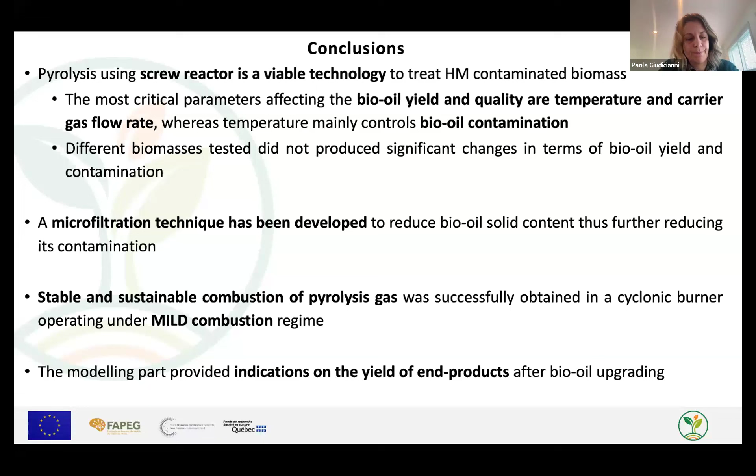Thank you very much. I don't know, can you hear me? No. Oh, right. Thank you. Thanks very much. And I hope, we're going to have to move on to another presentation online. So I hope your co-worker can answer your questions. Thank you. Okay. Thank you, Paola. Paola was joining us from Canada, so appreciate the early morning for her out there. Okay, now we're over to Chris Kick.

Chris, can you hear me? Yes, I can. Can you hear me? Good. Oh, wow, look at you. You look like an avatar. Okay, so can you share your screen? Yeah, I'm trying to do that. Second. What screen do I share? Your presentation, please. Do you already see some screen? I can see myself. That's good, I guess. Okay. Now you can see the presentation, right? Now I can see the presentation. Perfect. And you can hear me perfectly? Perfectly. We can only see a small corner of your face, but that might be intentional. Not really, but is it better now? I cannot see myself, so I don't know. Okay. All right. Floor's yours then. Yeah, thank you for having me.

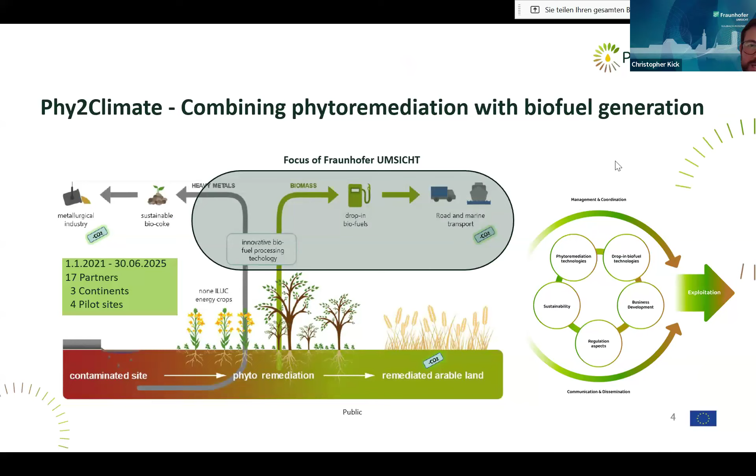So Phy2Climate in a nutshell. Phy2Climate basically combines phytoremediation with biofuel generation, and the project started in 2021 and it ends at the end of June 2025. It consists of 17 partners, it stretches over 3 continents and includes 4 pilot sites. Our part in the Phy2Climate project is basically the biomass conversion after it is harvested from the pilot sites and the subsequent refinement of the conversion products.

Our pilot sites are basically located in Spain and Lithuania, mostly contaminated with hydrocarbons, but the pilot sites in Serbia and Argentina are contaminated with heavy metals, above all cadmium, copper, chrome, lead, zinc, and arsenic. And this is important for the biorefinery concept, as we might focus and trap the heavy metals more in the biochar, whereas if we only have hydrocarbons as contamination, we don't have to care about that.

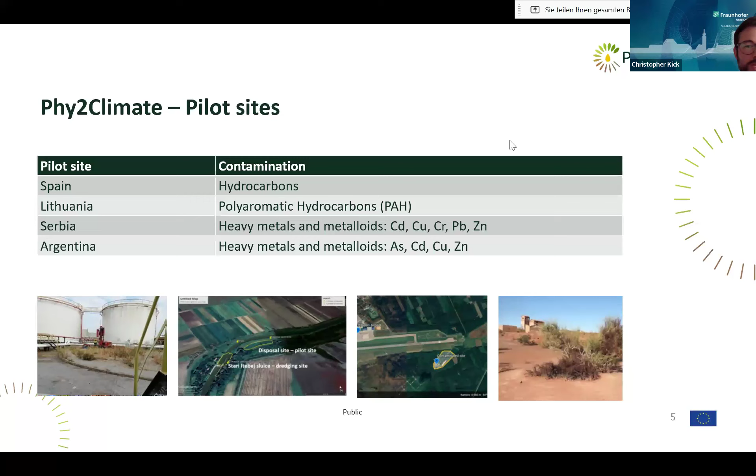Coming to the conversion technology within Phy2Climate, the requirements the project has on the technology itself, and also the product quality we can achieve. Well, as I said, the conversion is done with an intermediate pyrolysis based system called thermocatalytic reforming, short TCR. And it's a two-step process.

In a first step, it's an intermediate pyrolysis with an auger reactor where the biomass is broken down into biochar and volatiles in temperature ranges below 500 degrees. In a second step, those pyrolysis vapors will be led over the biochar at a temperature of about 550 to 750 degrees.

And in this temperature range, the biochar acts as a kind of catalyst, breaking down further long-chain hydrocarbons, effectively removing tars by that, and also increasing the product quality, especially the hydrogen content in the syngas, which is significantly increased from around 3% to about 40%.

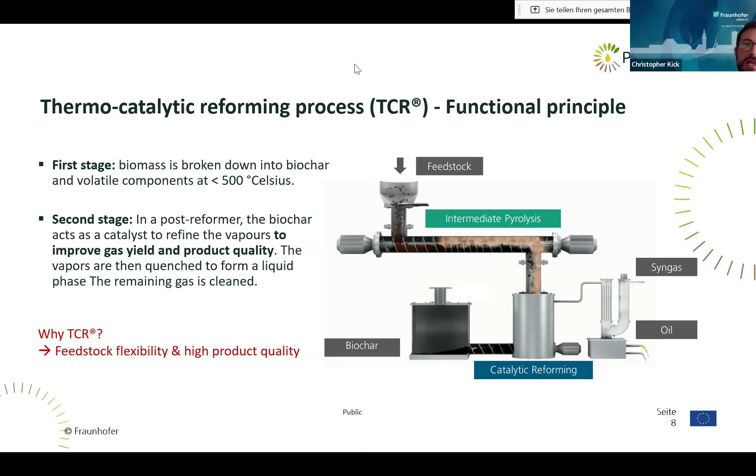So why TCR? Why not another technology? Well, first of all, in Phy2Climate, it comes to feedstock flexibility, as we're using lots of different feedstocks for the phytoremediation process. And on the other side, it needs high product qualities, because only high product qualities allow a further refinement to biofuels.

Speaking about feedstock flexibility, as I said, in Phy2Climate we're using different types of plants to remediate soils. For example, rapeseed, quinoa, sorghum, different mixes of herbaceous plants, and also Jerusalem artichoke. And with the TCR technology, we tested around 90 different biomass types, and they all worked. The biomass feedstocks had different chemical compositions, but also different textures, but it worked. The most important parameter is that they have a dry substance matter of above 70%, so they can be used in the process.

Coming to the product quality, as I said, it's important to produce not any kind of intermediates, but high quality intermediates so that they can be upgraded to ready-to-use biofuels. So with the TCR technology, it's possible to produce syngases with a hydrogen content up to 40%, which is important if you want to use gas to liquid processes afterwards.

Also, the oil we're producing is thermally stable, which means it can be processed in a classical oil refinery, which is also very important if you have a look at the economics of such a biorefinery. Because for small-scale plants, a decentralized refinement to full ready-to-use biofuels is probably not the way to go. And when it comes to biochar, we're producing biochar which is high in quality and can be used for different kinds of applications, like soil applications, but also material or energetic use.

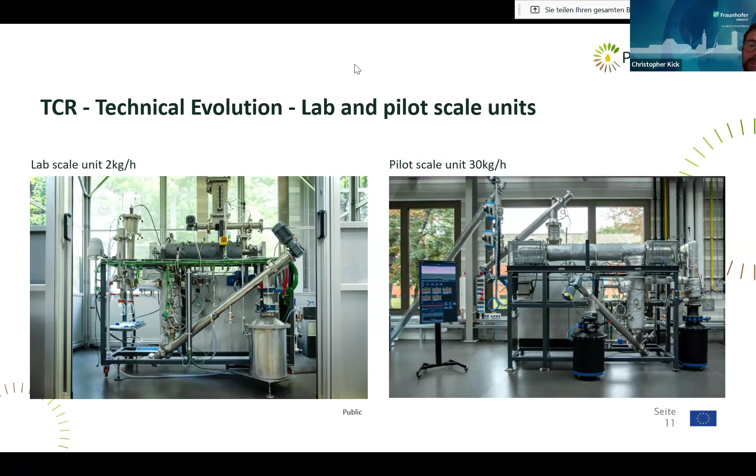Having talked about the functional principle and the advantages of the technology, I want to show the units we have. So starting with the smallest unit, our lab scale unit, TCR2, which has a feedstock capacity of 2 kilograms per hour. And this is also the plant which we use for all the Phy2Climate trials. But we also have a pilot scale unit with 30 kilograms per hour of feedstock. And then if you want to go big, we have a fully assembled and operational TCR 500, which means a unit which can handle 500 kilograms of feedstock per hour. And starting from the right of the presentation, you can see in green

Chris? Don't know if he's gone. I can't see. I can hear you perfectly. Are you there? Oh, here you are. Hello. We couldn't see you. We lost your connection. So where did you lose me? Can you still see the presentation? No, so you need to reshare your screen. I'm very sorry about this. No, don't worry, it's fine. These things happen. Can you now see the presentation again? Yeah, we can see the screen now. Okay, where did you lose me? It's when you were pointing at the reactor. This one? This one, yeah.

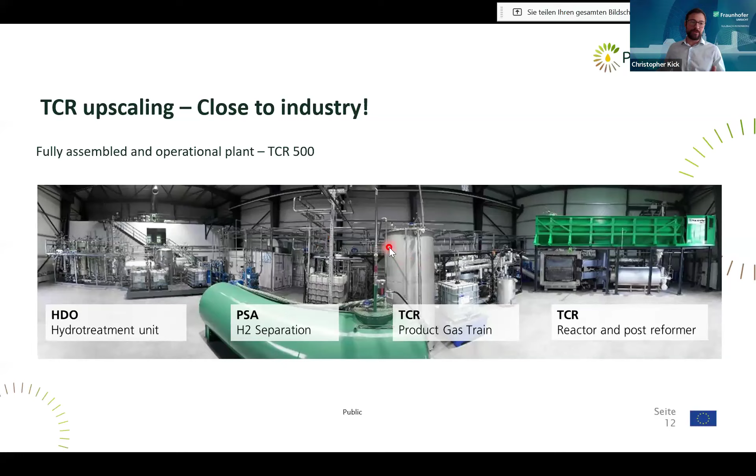Okay, that is our biggest unit, a TCR 500, which is able to handle 500 kilograms per hour of feedstock. This was a plant which was built within another EU-funded project called To-Syn-Fuel. And with this plant, we were able to produce biofuels out of sewage sludge.

For the other products, it's vice versa. So the lower the post-reformer temperature, the higher the amount of biochar, aqueous phase, but also the oil phase will be. And it is important to understand this link between post-reformer temperature and mass distribution, as it gives you the ability to control basically the product distribution, but also the contamination concentration within those products.

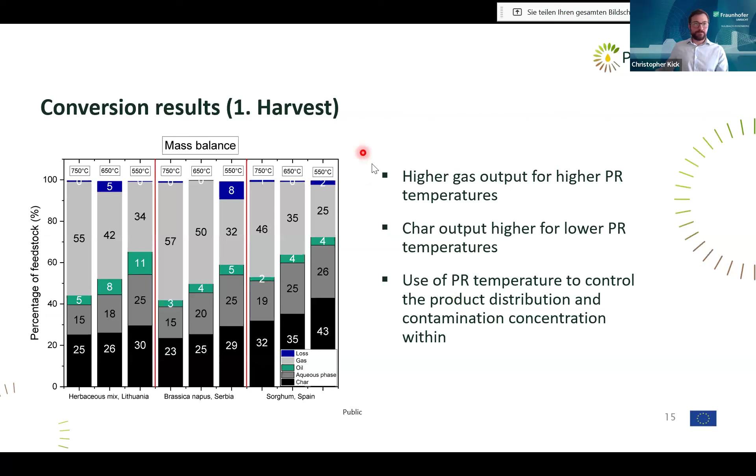Chris, we've lost your screen again, if you can still hear us. And we can't hear you again. Here we are. I can see you. I don't know what's happening. It's every time I move, I just need to stay still. Yeah, that's probably it. Okay, I'm very sorry to all of you. I don't know what's going on here.

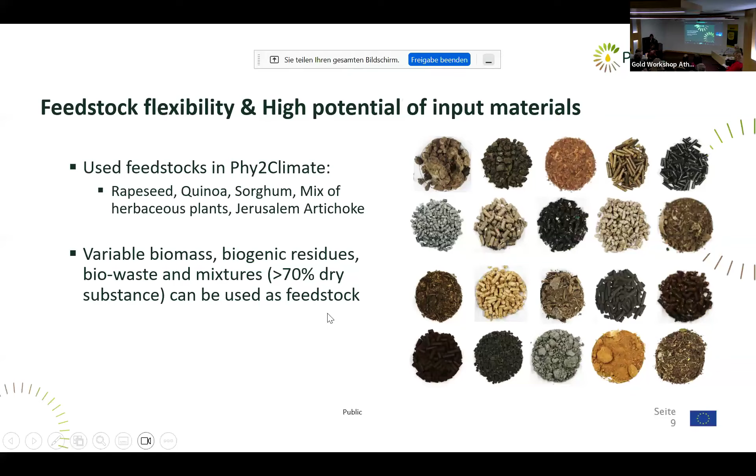Okay. Getting there. Did you hear? So this was the last slide, right? Yeah, we're with you on that one.

Yeah. So again, the refinement of the biochar is important because for heavy metals as soil contaminations, we want to make sure that we trap the heavy metals in the biochar. And for this, we varied the post-reformer temperature to see what is the optimum temperature to trap as many heavy metals as we can in the biochar. And for us right now, in the initial trials, it's at 650 degree post-reformer temperature where we are able to trap most of the heavy metals.

For other post-reformer temperatures, either if they are lower or higher, the amount of heavy metals trapped in the biochar seems to be lower. So we still have to do further trials to verify these results, and we're not sure why it is like that at the moment, but this is what results show.

So coming to the oil refinement, because we want to turn the TCR oil into marine fuels, we've done some trials to test this, and for this we used a simple lab distillation unit and had two boiling points, one at 150 degree and the other one at 250 degree.

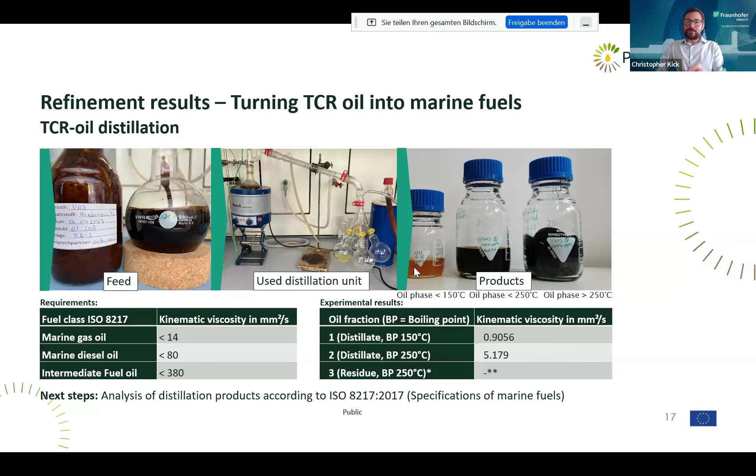And on the tables on the bottom, you can see that the most important parameter for marine fuels, the kinematic viscosity, was for both distillates lower than for the highest quality marine fuel, which needed a kinematic viscosity lower than 14. We had 5, so that was good. Further steps are to test the full range of parameters which are in the norm of marine fuels and to see if the distillates also fulfill those requirements.

Hopping to the aqueous phase, I just want to make clear you all understand what we're trying to do with the aqueous phase in the project. So what we want to do is, first of all, to purify it in order to be able to bring it to a sewage system, but also we want to produce hydrogen and use this hydrogen as a feed in the subsequent gas to liquid process.

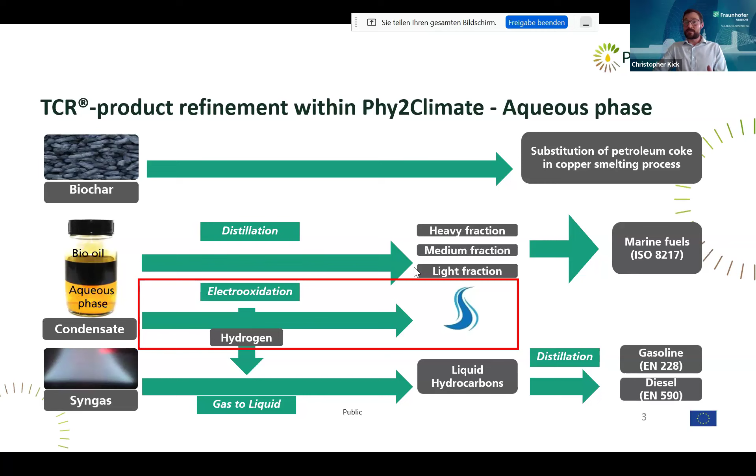First purification results of the aqueous phase, which we made with the test stand on the right side, show that we can reduce the TOC significantly by means of electrooxidation, bring it down to lower than 1,000 milligrams per liter, which then allows us to bring it to a sewage system. And also at the same time, we could produce hydrogen, which we will then use.

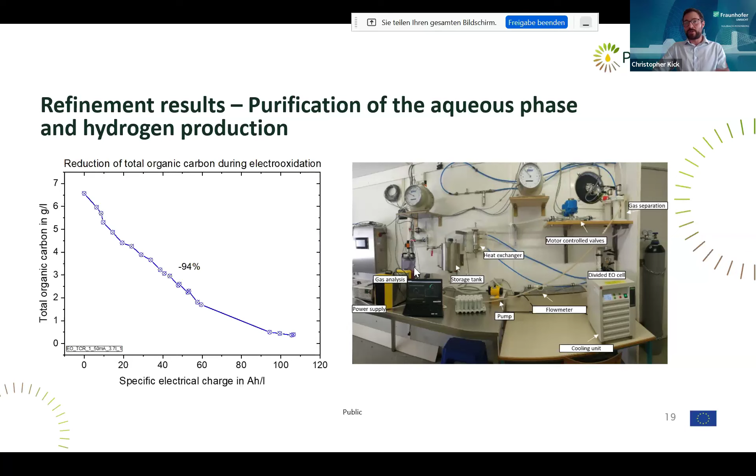And now coming to the most sophisticated and technically difficult part in our biorefinery concept, and it's the refinement of the TCR gas to be able to use it in a gas to liquid process. And what we found out as we dived deeper and deeper into those processes was that there are various GTL processes, and all those process product qualities are linked to the sensitivity of the used catalyst.

And this brings us to the point that if you have a very sensitive catalyst, it might not be economically feasible to do this refinement in a decentralized plant. Well, what do I mean if I say it's technically highly sophisticated? I mean the gas has to be purified very intensively. And we did that.

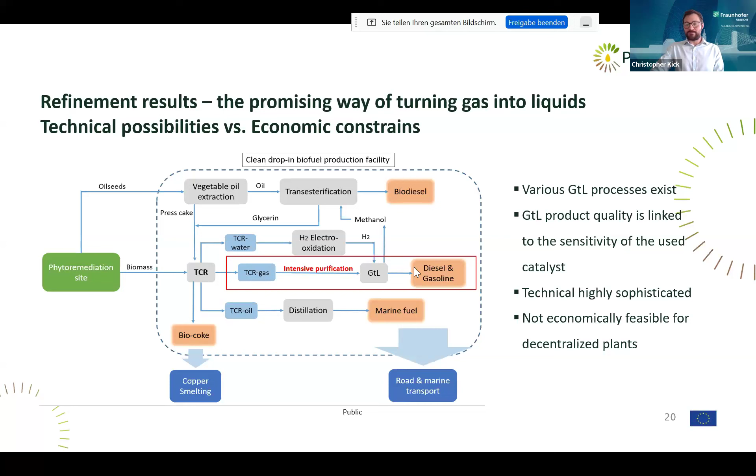We built a gas scrubbing unit, basically a very sophisticated one, containing 2 gas scrubbers in the beginning, an acidic and a basic one, for the initial cleaning of ammonia, but also hydrogen sulfide. And then we had subsequently 2 fixed bed reactors for the remaining hydrogen sulfide by using iron oxide pellets. We had 2 cooling traps, one for the removal of water and the other one for the removal of the remaining ammonia. And then we had 2 fixed bed reactors for the removal of basically anything else. That was highly sophisticated.

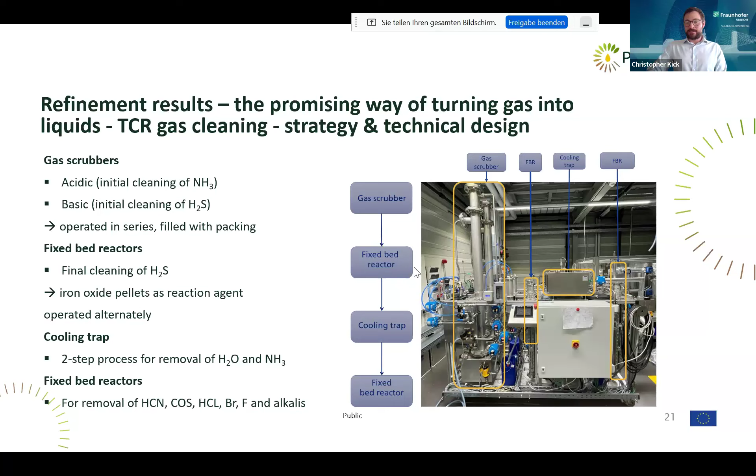And our results show that we can bring down the concentration of ammonia and hydrogen sulfide very significantly from initial concentrations of 3.5 mass percent to basically lower than 5 ppm. Also, we could show that we can bring down the relative moisture in the gas to nearly 0, applying this gas purification strategy.

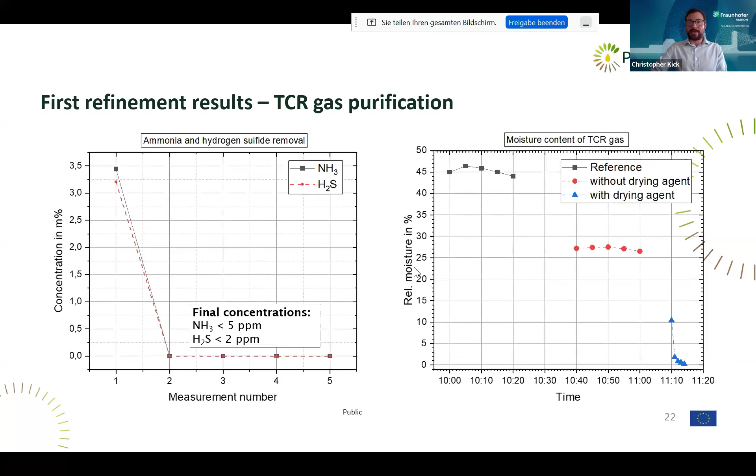But with all these efforts, we were still not able to reach the thresholds for poisoning compounds for sensitive catalysts used in Fischer-Tropsch or methanol synthesis, because they require thresholds for ammonia or hydrogen sulfide in the ppb range, so like 1,000 times lower than we could achieve. And this is the reason why we then tried to find alternatives.

And one of the alternatives is the so-called Synol process, a very old process, but robust. And the quality of the product it produces might not be as high as for the other processes, because it only produces oxygenated hydrocarbons.

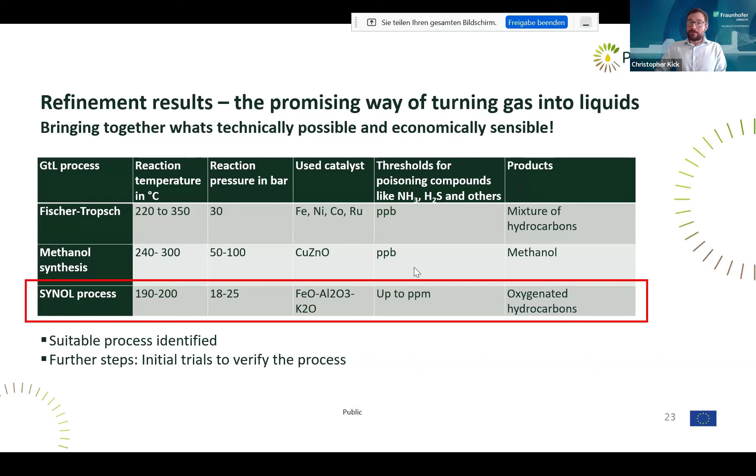But those hydrocarbons are already liquid, and they can be stored and they can be transported, and they can be upgraded in a classical oil refinery. So it's robust, but the quality is not as high. But we think that it will work compared to the other first planned GTL processes.

And this is finally the biorefinery, how it looks right now, basically learning from our experiments. We're not going to produce diesel and gasoline out of the GTL process, but we want to produce thermally stable liquid energy carriers and then upgrade those in conventional refineries.

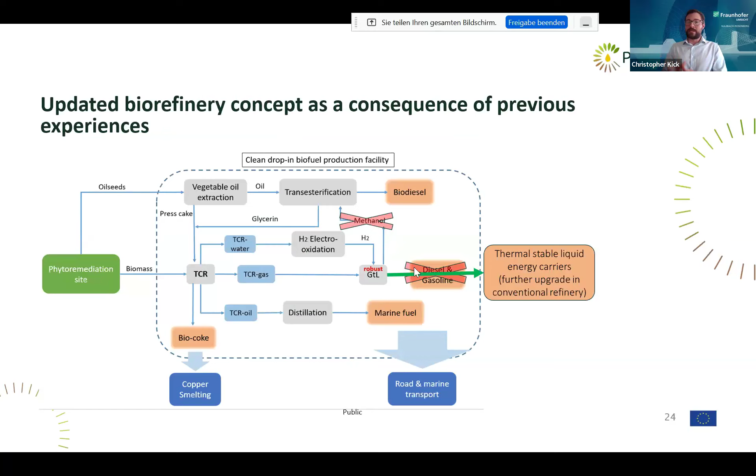Further steps. Well, if it comes to conversion, we want to verify our mass and energy balances with biomass from the second and third harvest, so two are still coming. And also we want to verify identified conversion parameters for different biomasses and soil contaminations, because it might make a difference what kind of product we want to produce in regards to the initial soil contamination, even if it's...

We've lost you again, or the screen. Don't know if you can hear us. We can't see or hear you, Chris. There we go. Back on. Okay. Okay, I'm back. I'm getting faster every time, but this might be the last time.

Okay. So in regards to the refinement, we want to optimize our intermediate refinement through process parameter variation, so that we really are able to shift the contaminants between our products in regards to our requirements. And then we want to develop a mass and energy concept of the overall biorefinery.

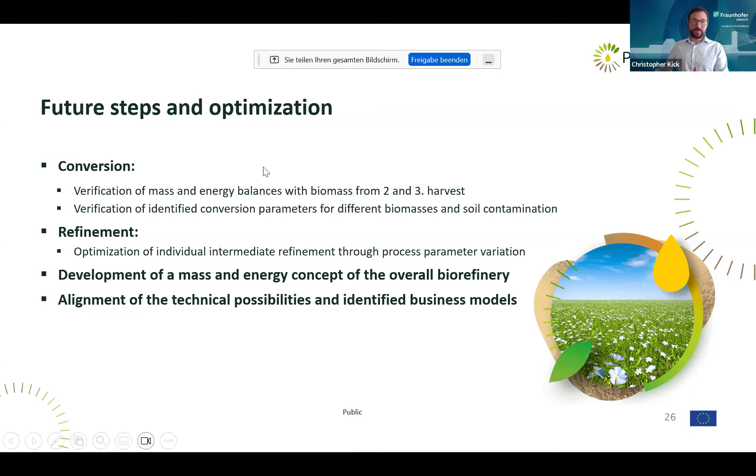And finally, we want to align our technical possibilities, so all we learned right now from the lab, and bring it together with our identified business models from other work packages, so that technical possibilities and economics go hand in hand. And with this, I thank you all. I am very sorry for these technical interruptions.

Thank you, Chris. If you can stay there just a couple of minutes, I think it would be the kindest thing to give somebody a chance to ask a question. It would seem reasonable before you vanish, literally. Okay. Is there a question for Chris? Any questions? There's one here. Two. Oh, yeah. Thank you, Emma.

I would like to understand, since you're not going to make diesel and gasoline now, what will happen to the hydrogen? What will happen to the hydrogen stream, since you're not going now to upgrade the intermediate to diesel and gasoline? What are you going to do with that?

Yeah, that's a very good question, and we didn't decide right now because this process of changing the concept of the biorefinery is a very new one, but we still might need it in those processes, but maybe not all of it. So it's still to be decided. It could be a product of the biorefinery itself, and you could sell it separately in this case.